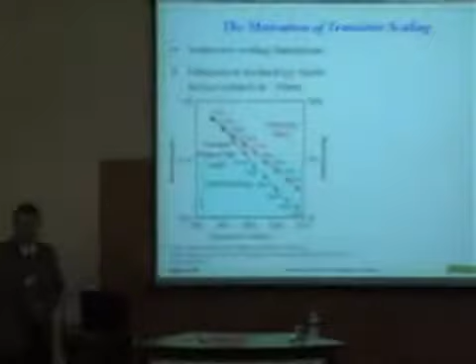So we saw earlier in the conference, I forget which speaker it was, but was looking at the technology integration that's basically documented by Moore's law and the expansion of the scaling of our technologies, as well as the reduction in feature sizes that have allowed that migration to take place.

That's basically represented by this red curve on this graph. As we see, currently production is at 65 nanometers. At 300 millimeter substrates, they are producing 65 nanometer features, which is a remarkable technological feat.

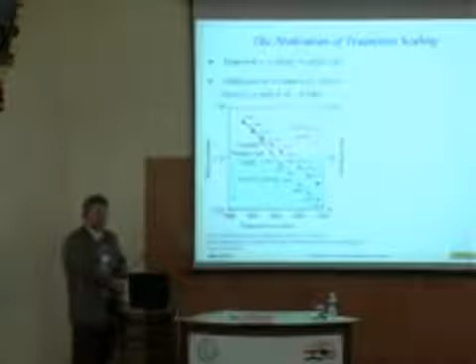This is being done primarily by Intel, but it's being done also by companies like NEC, IBM Corporation, Texas Instruments, a very wide host of companies in the field, Samsung as well. And what was recently announced was the full demonstration of 45 nanometer technologies.

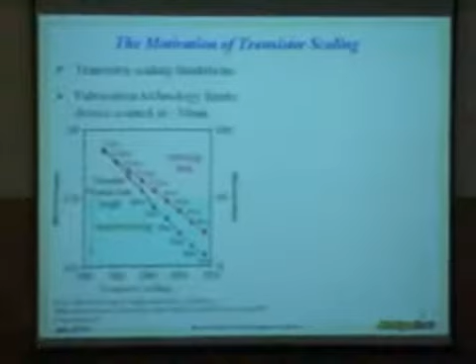This is actually real gate lengths in these devices. Now, when we start talking about dimensions that are 40 nanometers and smaller, we're talking about devices that definitely are reaching quantum limits, and yet they are still pushing existing technologies to these levels.

So the question might be asked, what's going to happen to these quantum-based devices if the trends continue to the ultimate limit that we see with silicon-based FET devices, where the quantum effects tend to take dominance at about 10 nanometers.

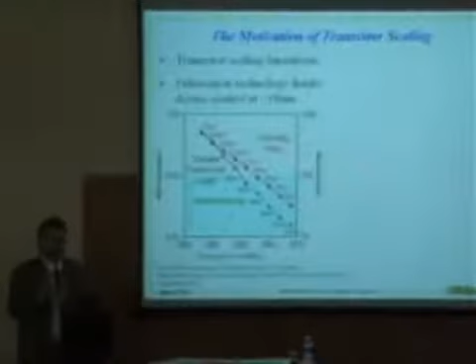We see that nanotechnology and nanoscale devices, which are basically using quantum effects, things like nanowires, nanorods, nanotubes, progressing in size at a more rapid pace, but where these two might merge and how they may work together isn't absolutely clear yet, whether quantum-based devices are going to easily be integrable with microscale FETs or submicron FETs.

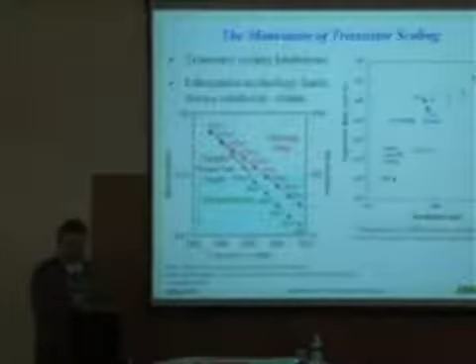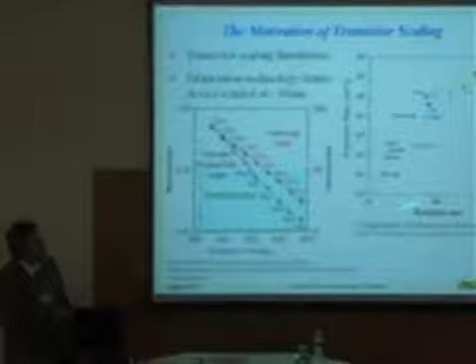So one of the key technologies that limits this is the ability to produce features at these dimensions, and that has been one of the main pressures on the semiconductor industry and on the industry that supplies equipment to it, in producing tool sets that can produce features below 40 nanometers, which is basically right in the middle of this graph here.

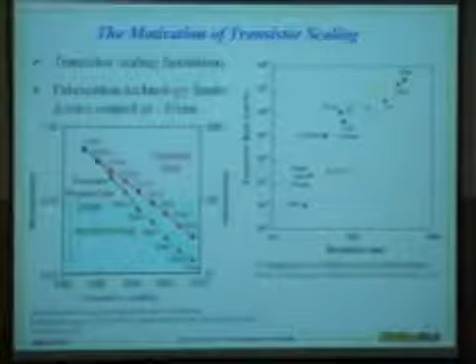X-ray was a favorite for a long time in the 80s and early 90s in trying to look at X-ray technologies as a migration path to smaller features. In reality, the cost, expense, and difficulty of producing X-ray based lithography has basically pushed that trend aside as laser-based light sources have come on at much shorter wavelengths and have kept the industry pushing into these extreme ultraviolet ranges.

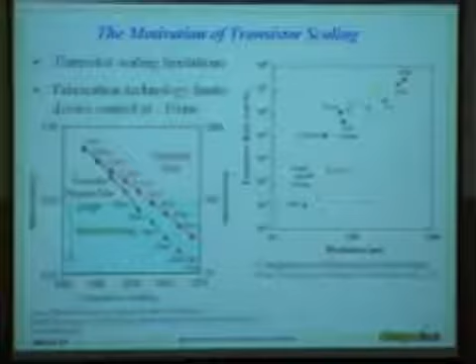But when we look at nanoscale technologies, we have to find a different type of technique to produce 10 nanometer features. The most prevalent method utilized is single point E-beam, or E-beam lithography techniques, as far as producing features that are in the 20 nanometer or possibly even smaller range.

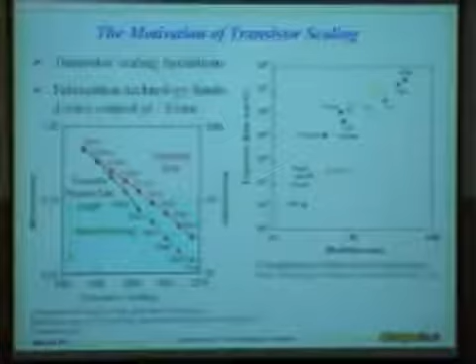I think the smallest I've seen documented is on the order of about 8 nanometers for lithography using electron beam. So we have a smaller set of technologies that allow us to look at these features below 40 nanometers.

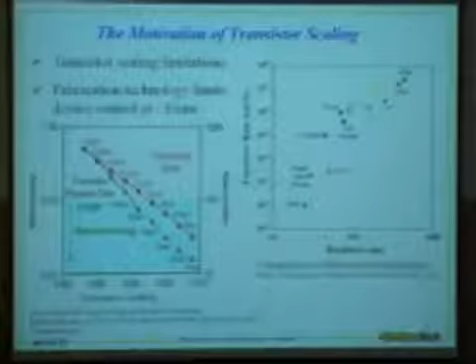We essentially see dip pen writing, ion beam milling, and a few other techniques documented here. I will later in the talk discuss more about how we are addressing producing patterns and producing features at the sub-40 nanometer range.

So how do these nanoscaled and quantum devices fit in with the grand scheme of things? Every couple of years, the International Technology Roadmap Organization produces a new ITRS roadmap for the semiconductor industry, basically drawing on the expertise of some of the leaders in the field.

And in the 2005 edition, they had a very nice graph which represented what they viewed as some of the more important categories associated with these devices. On the horizontal axis here is basically the speed of the devices, projected on this side. The cost is projected along this back face.

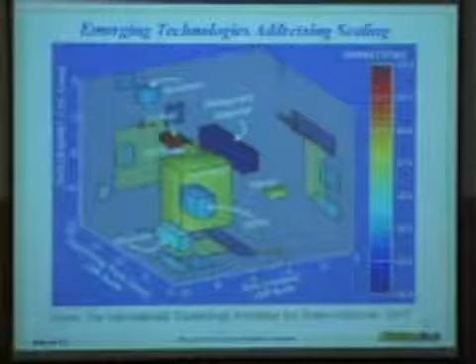The cost of the technology based on the projections that they had, and then the size you can see projected on the bottom face. And if we look at where silicon CMOS-based technologies are, we see that they've basically explored down to about the 10 to the minus 8 meter range, in that 40, 30, 25 nanometer range, possibly even down to 10 nanometers.

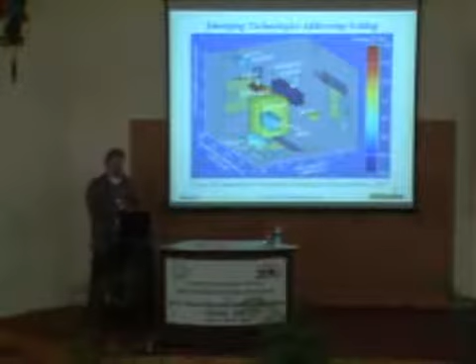And we see where some of these other technologies lie, some of which we've talked about. We've talked about some biologically inspired technologies, molecular electronics. I'm going to be talking about some alternative quantum electronic devices, effectively SET devices. And some of the work discussed about carbon nanotube-based devices also would fall basically in some of these ranges.

But what you'll note is that there are trade-offs in how these devices behave. There's no one device that has either the smallest feature size, coupled with the fastest switching time, coupled with the least expense. So industry is probably going to get to a point where it finds niche areas for specific types of devices and specific types of uses of these different technologies.

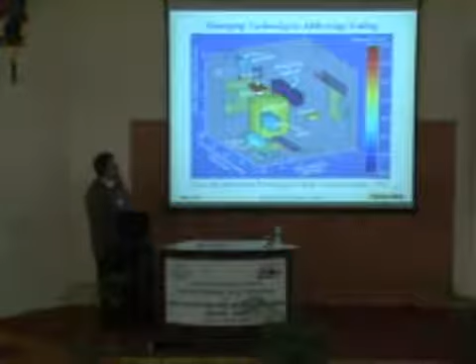So I fully expect us to see over the course of the next 20 years the integration of SET devices with molecular electronics, with biologically inspired devices, perhaps all on the same substrate in the same monolithically integrated package. I fully expect to see all of them for certain applications.

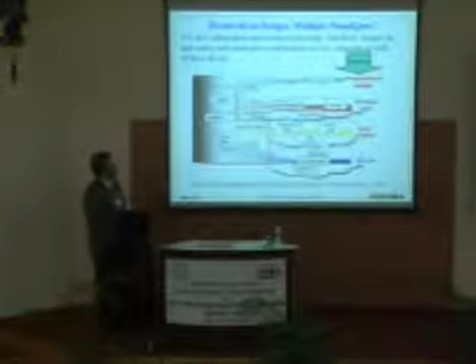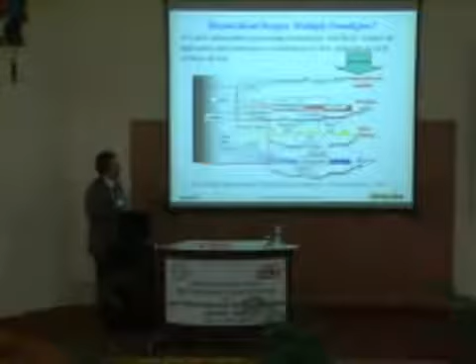So, because they all have different implications for how the device behaves, I think we also have to look at this hierarchical structure where we look at how the device behaves compared to the paradigm that we're currently in, and whether there are other paradigms necessary to allow us to go to the next state, whether it be with the techniques with quantum computing or soft computing, whether some of the spintronic or molecular devices will allow some unique contribution in those areas. That is not fully realized right now.

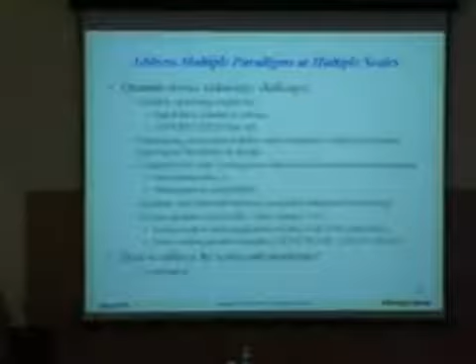So there's a lot of challenges. I think one of the major challenges is finding a way to have these devices interact with the microscale devices, and really that's related to the scalable operating conditions. A major issue with a lot of these ultra small devices is that either they do not conduct a significant amount of charge, or they require a significantly large signal voltage compared to the voltage out that they produce.

And so the signal drive, whether it's a current or voltage drive, and whether we have the potential for amplification, which is one of the main drivers for producing a transistor, is that you can produce amplification or produce some sort of a switching result, is going to be a major issue in which of these types of devices finds utility and in what mode they find utility.

It was brought up earlier in the conference that there's no paradigm right now for looking at how interconnect delays impact computing significantly, and I think that this also is something that we're going to see in a very different way at the quantum scale with these quantum devices.

So I fully expect to see either direct integration or a heterogeneous integration of these devices to find some way to produce compatibility with existing microelectronic infrastructure. Because that infrastructure is not going away. That's an enormously valuable industry to the global economy.

And that's an industry that wants to succeed and wants to find ways to keep itself going and keep itself thriving. So I'm sure that necessity is the mother of invention, and I'm sure that there will be ways that is borne out. So can we find ways to have both quantum and classical behavior merged into this integrated technology?

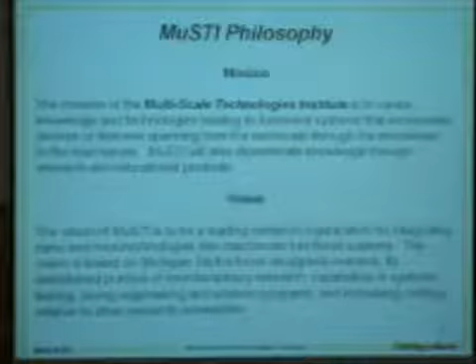This institute was formed during 2006, but really came out of research initiated back in 2000 and in 2003, looking at technologies at the micro and nanoscale and trying to address issues that span the scales, where we were looking at technologies associated with molecular level and atomistic modeling devices, and figure out ways that these devices would be able to interact with the real world, because we certainly live in the real world even if we want to have devices that are at the nanoscale.

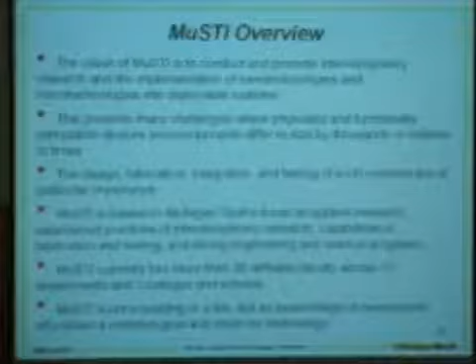So we've done that by providing a framework in which we can conduct and promote interdisciplinary research. We have roughly 35 faculty associated with this institute right now, a very diverse body of faculty, from chemistry to physics to all of the engineering disciplines engaged in our college and university.

This has been our effort to provide a framework from within which faculty at our university can engage in trying to address these questions and address the technologies that both impact the nanoscale, but also find ways to practically apply the technologies and science that's been developed into applications that will impact the real world.

So some of the issues and technologies you've already seen represented through Dr. Yap's presentation and Dr. Pandey's presentation. There's a lot of work that's also done at the mesoscale, modeling and developing technologies.

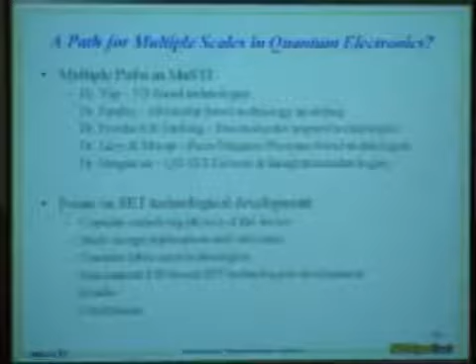So what I'm going to focus on for the remainder of my talk is some work that we started in 2003, really effectively 2004, in developing technologies for producing room temperature single electron transistor devices.

So we have a group, part of my group, looking at the underlying physics of the device, developing the technology, studying the implications of the design, and demonstrating technologies to produce these sub-40 nanometer features. A lot of that focus has been on developing technologies surrounding the focused ion beam instrument that we acquired through this grant that started in 2003.

So why single electron? There are several advantageous characteristics of these devices. They are three-terminal devices that, for the most part, mimic the behavior of field effect devices. That's not completely accurate, but if you think about a field effect device, you can glean most of the understanding you need to understand how the SET device operates.

Based on some of the technologies developed, we can see that they are potentially monolithically integratable with existing microelectronic devices in a truly three-dimensional integration, meaning that we might be able to produce hundreds of layers of SETs, hundreds of sheets of SETs on top of existing platforms. There are several material systems that have been demonstrated to produce very effective room temperature capable SET devices, and both planar and non-planar configurations of these devices have been demonstrated.

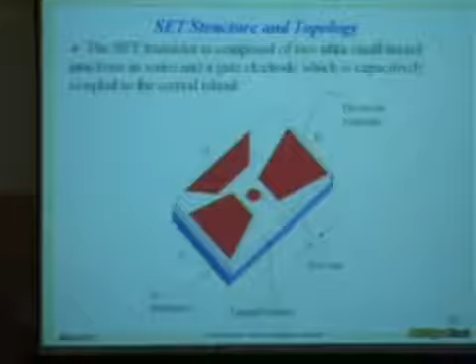So basically, the SET as a three-terminal device has a source, drain, and control gate, just like a FET does. The difference in behavior is that it utilizes either one or many isolated quantum dots to produce a tunneling current behavior that is controlled by this control gate.

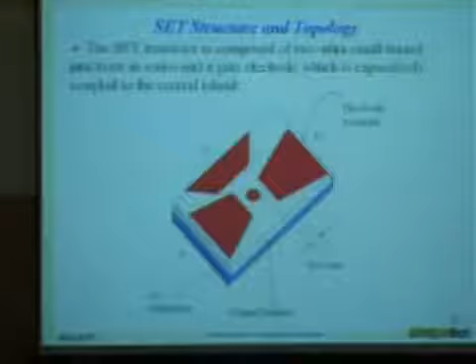So the energy on the quantum dot is controlled by the gate, and the behavior of the device, at least the current throughput, is characterized by unique energy levels, as you would expect for quantum confined electrons on a quantum dot.

The position of the gate matters. The device is configured - for planar devices, top gate, bottom gate, and side gates have all been considered. This is just a simple schematic of a side gate device, where the side gate provides a potential to the quantum dot.

Because the coupling capacitances between the electrodes matter in these devices, you would like to have very small coupling capacitances, very low capacitances, for these devices to operate at speeds that are significant and operate at temperatures that are also significant.

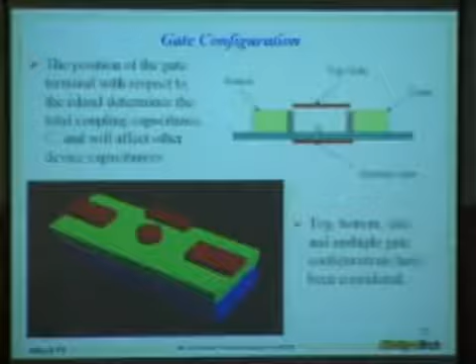Functionally, if you were to draw a schematic of these devices, or how they would be utilized, you have your source and drain terminals coupled to the quantum dot through a capacitance and a tunneling resistance, and you have a capacitively coupled gate to the quantum dot to change the energetics of the dot.

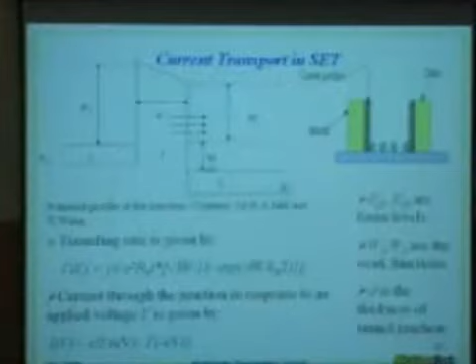The tunneling rate is given by the energetic favorability of the available states, reflected by the energies across your tunneling barrier. This tunneling resistance represents the probability of tunneling across those barriers. Because we want to look at current flow, we want to look at both the tunneling probability both ways and the tunneling probability across both junctions.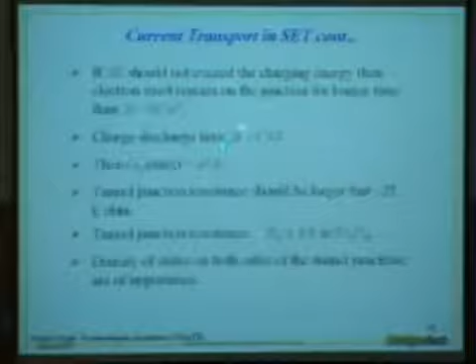There are some characteristic limits of how the device behaves. The charge and discharge time, or the switching time of the device, is related to the total capacitance of the device divided by the conductance of the device. The limit on the conductance is based on the quantum limit of the material. Tunneling junction resistance is also based on the available states on both sides of the boundary. I think I'll move on past this because I want to get into more characteristics.

A significant reference paper produced in 1999 from Konstantin Likharev is a very good survey paper on the fundamentals and the theory behind SET devices.

SETs behave as a switch, as you would expect, based on the gate bias, modulating the region over which electrons can be transported across the barrier. They tend to have characteristics that look very much like this. Interestingly, if you look at deep submicron field effect transistors, you also see a similar kind of behavior in those devices.

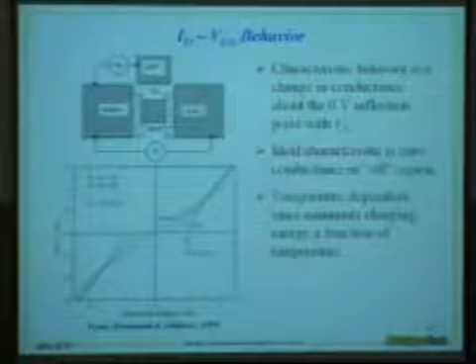So in the region around 0 is where you have this separation, where you basically have an off state or a near off state in the device behavior.

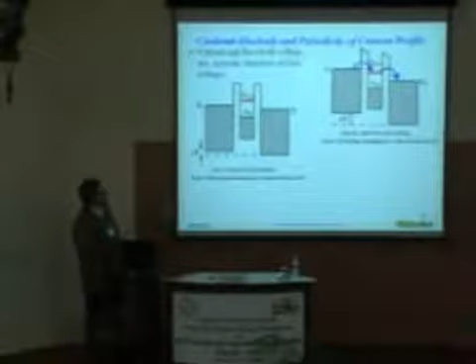As I mentioned earlier, the favorability of tunneling depends upon the energetics of the conditions of the quantum dot with respect to the source and drain. So the side gate or the gate electrode can change the potential on the quantum dot, allowing for a favorable transition to take place one way or the other.

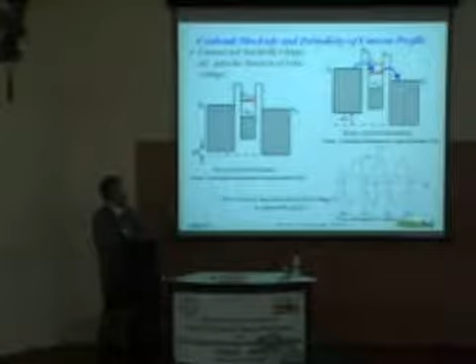These devices can be produced in a fashion where it's a very reversible device. The source and drain can be reversed, or it's possible to make them look very one-sided by adjusting either the width or the barrier height from one side to the other between the source and drain of the device.

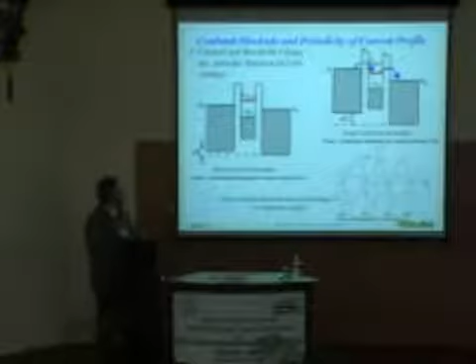Characteristic of these devices are regions at which current can significantly conduct and regions where current does not conduct. As you adjust the gate voltage, you tend to see regions with spikes in current and other regions with nulls in current, related to the energies of the available states. This is borne out in what's called Coulomb oscillations in the output drain current as a result of sweeping the gate voltage for various drain source biases.

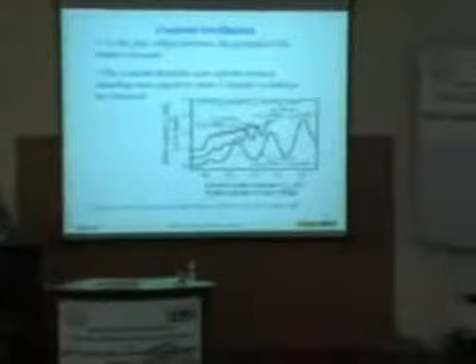This is an example of that for different conditions. This device in particular was measured at 77 Kelvin. The characteristic widths and heights of the current spikes seen in the Coulomb oscillations are representative of the energies in the system.

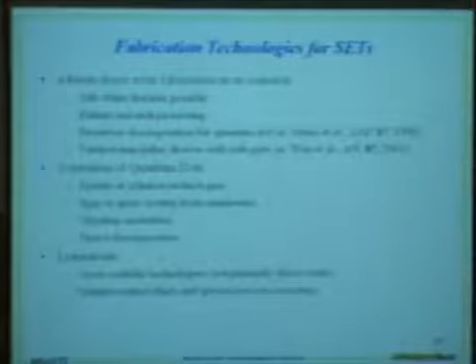There are some major challenges for fabricating these devices. The most common method right now is E-beam direct lithography, capable of producing sub-40 nanometer features. It has been used for both the pattern and etch process, where a pattern is produced in resist and a feature in the underlying quantum dot and electrodes are produced by etching. It's also been used for direct decomposition of quantum dots and for producing both vertical and lateral type devices.

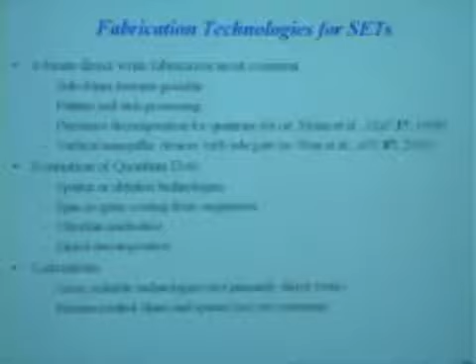There are many methods for quantum dots. There's sputter or spin or spray coating from a suspension. Some of these have already been discussed at this meeting. We have the potential also for ultra-thin nucleation, where we have a droplet nucleation on the surface by evaporation or other methods, or direct decomposition techniques.

The limitations we see are that E-beam lithography is not an easy technique to do large volumes of devices at once. So if we're looking at producing a 300 millimeter substrate with billions of transistors on it, it is not an array scalable technology.

It's not something that you'd want to have to direct write for every wafer. It would be very time consuming and very expensive as a result. And we still have issues with feature control where our lines and spaces are not yet consistent because we're pushing the limits of these capabilities, these technologies.

So because of our acquisition of our focused ion beam tool, we've taken a look at that as a potential technique for producing a planar SET structure. We've done some development on focused ion beam etching as well as deposition methods, and I'm going to present some of that hopefully relatively briefly to you.

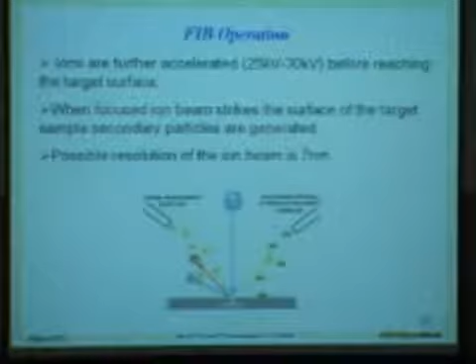So when focused on the surface, they have the possibility of producing one of 4 different things. They can sputter etch the surface, they can produce heat in the substrate, they can implant themselves into the substrate, or they can be used to decompose a gas at or near the substrate.

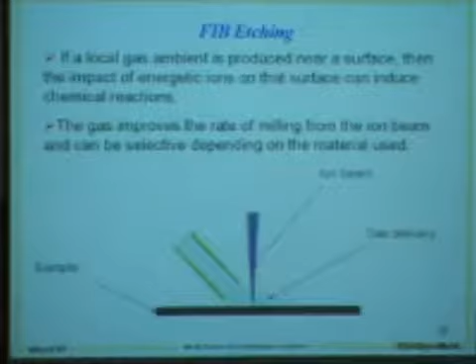So in an etching condition, the ions, as they reach the surface, primarily serve to heat and sputter the material from the surface, and this is called the ion milling technique that you may be familiar with.

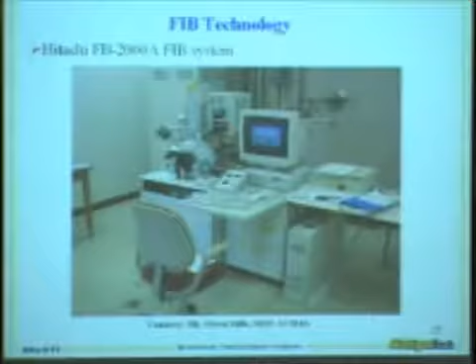So another image of the column. This is actually our Hitachi FB2000 FIB that we utilize. This is configured also with a beam scanner that allows us to use direct CAD layouts for producing features on our substrate, and gives us a lot more beam control than the system as is.

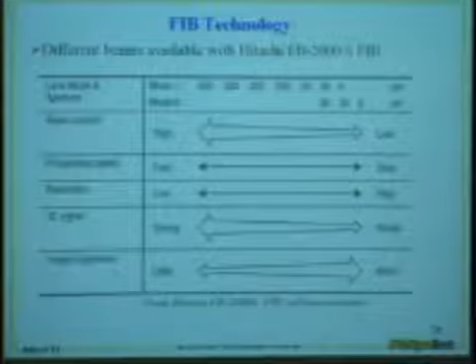There are many modes that we can choose from: very large apertures and high beam currents to very small apertures and small beam currents that can be used for different applications, whether milling or for deposition or for very fine resolution pattern milling, and some basic kind of common sense sort of things. The larger the beam size, the faster your processing, and the lower your resolution, as you would expect.

So more detail of these modes: we see that we have a range of beam currents from tens of nanoamps down to a few picoamps. So we have a very large range over which the process can be controlled for producing features at various scales, and we make very good use of that in the production of our features.

So typically the beam is scanned in a raster arrangement based on the magnification that's been chosen and the beam size that's been chosen. The pixels that are magnified are determined by the magnification, the center-to-center distance, and the distance between the raster scans of the beam. And the dwell time defines basically how long the pixel maintains, or how long the beam stays at a particular pixel.

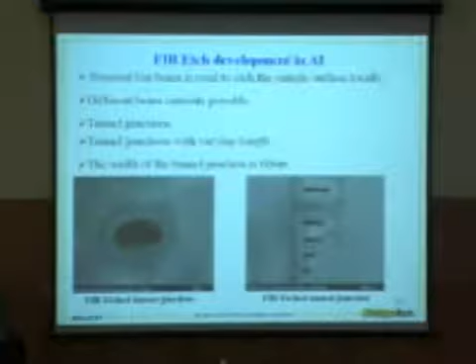The effort has been used to initially look at what kind of minimum features can we produce. These were some features that were down in the 100 nanometer range for etching. We wanted to see, can we produce quantum dots by this method out of a single sheet of, or a continuous sheet of metal. And we've shown that yes, you can, but in the etch method you're limited in the production of the dots based on the size.

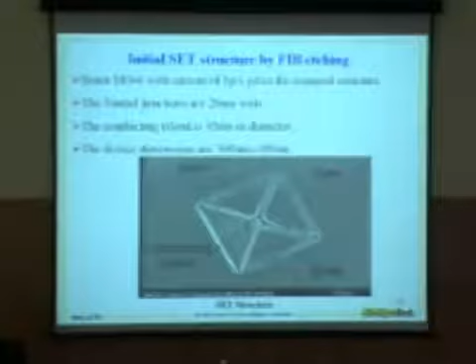We found this somewhat troubling because we didn't really want a SET with a 40 nanometer quantum dot. We wanted an SET with a quantum dot that was significantly smaller, so that would be much more feasible to operate at room temperature. A 40 nanometer dot basically can operate in the liquid nitrogen temperature range.

So we developed this etch technique as far as we could to produce the actual 3-terminal structure, producing then a 40 nanometer quantum dot with basically a 20 nanometer tunnel junction, which is a very large tunnel junction, source, drain, and gate features by this focused ion beam milling.

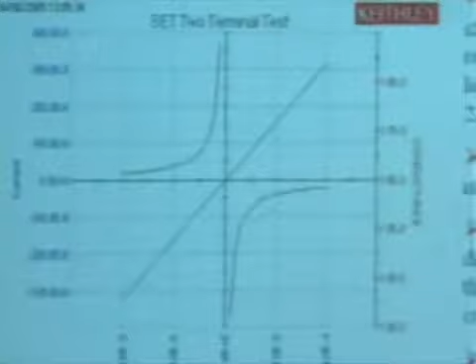Well, it wasn't an ideal structure, but we wanted to see what it would do. So we did some initial testing on this device and determined that yes, we did have isolation. We were getting some unusual behavior from our conductance curve. Looks like a straight line. It's not exactly a straight line near zero gate potential.

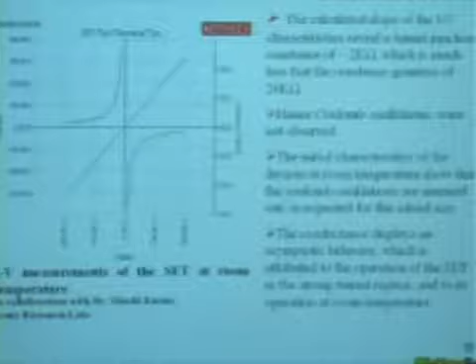What we saw was that our tunnel junction resistance was significantly smaller than our quantum resistance, just based on the thermal energies of the electrons. So we didn't see any Coulomb oscillations with this initial device because we had such a large quantum dot. But it did allow us to look at some initial behavior of the device, and allowed us to pursue an alternative path. I'm going to skip this for the time being.

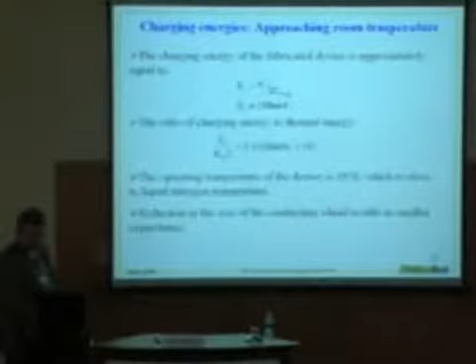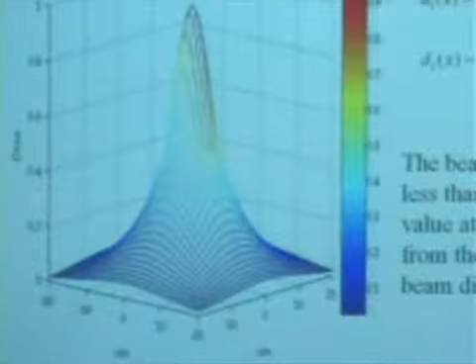An alternative path where we wanted to understand what were the limitations of the process technology, what were the limitations of the beam etching. The focused ion beam has an error function profile near its tip with a Gaussian tail. This is a profile that has been characterized over the last decade by the manufacturers as well as by several researchers around the world.

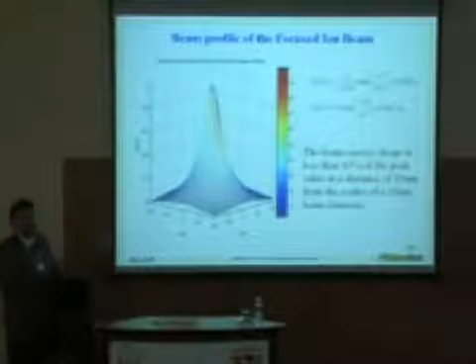That profile results in a significant amount of energy and a significant dose of ions that extend far beyond the nominal full width half max feature profile, which is what is stated. So we wanted to look at how small can we actually go with this technology, and what are the implications of doing this etch.

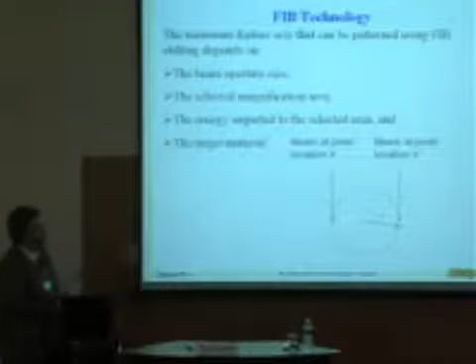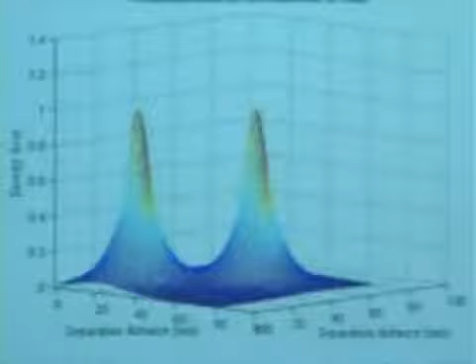So we played with the parameters of our tool, looking at a circular rastering pattern, which was required to produce an isolated dot. We wanted to look at how much energy was being imparted to the region inside this raster scan, to understand both material properties and how much energy was being applied to the dot as opposed to the region where we wanted the sputter etching to take place. So we did a series of models to look at how the energy overlap behaves as you bring that circular raster scan closer.

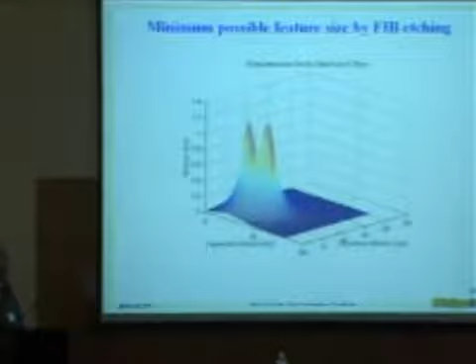We see that at 40 nanometers we have minimal energy being applied to the central region of the dot. But as we get to smaller regions, 20 nanometers for instance, which would be a very nice size, this would produce on the order of a 12 to 10 nanometer quantum dot. We see that roughly 60 to 80% of the energy that we see at the peak of the beam is being applied to the center of the dot as well.

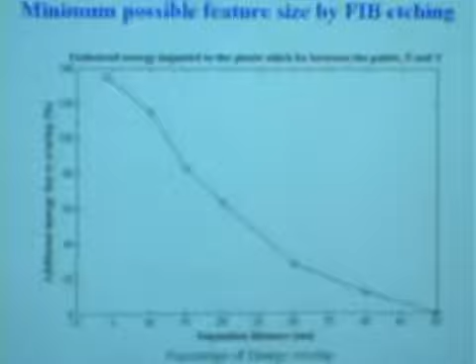Obviously as you get closer, that becomes even more of a problem, where basically you're overlaying your beam right on itself. We see that we have really a functional limit in terms of how much or how close in proximity we can produce features. And we've seen this through other experimental evidence that the amount of energy applied to the regions we don't want to etch becomes significant at sizes below 30 nanometers, even for the smallest beam size we can produce.

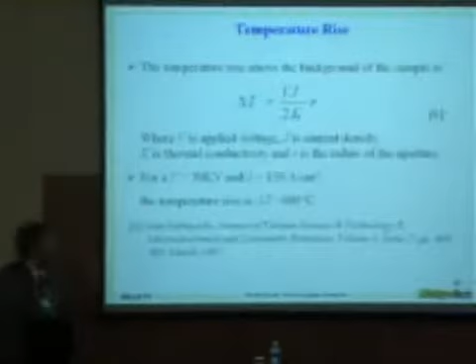We did some analysis of this based on the dose, the accelerating voltage, and the radius of our raster scan, and we found that for a 30 nanometer radius, we were seeing temperatures on the order of 600 degrees C locally where that dot was being produced.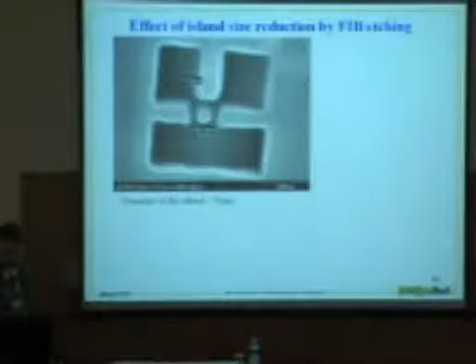So just some examples of how this was done. We see at 50 and 45 nanometers that we can still produce quantum dots, but at dimensions below 30 nanometers, especially in aluminum, which is a lower temperature material, we're seeing this causing a problem. So we thought, okay, we're not going to be able to get our 1 to 10 nanometer quantum dots by etching. We're going to have to come up with another technique.

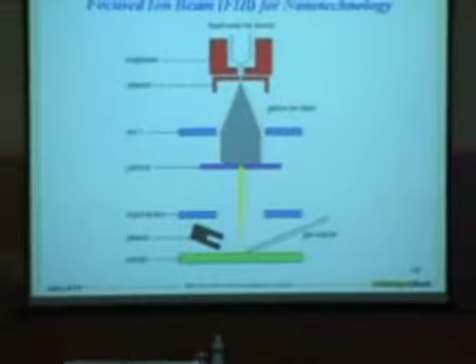Well, fortunately, we also are able to do deposition with our tool, and we actually have a tungsten gas source, a tungsten precursor source for producing tungsten thin films by FIB. And we thought, okay, can we produce isolated islands of tungsten by FIB deposition? So we wanted to look at controlling the island formation.

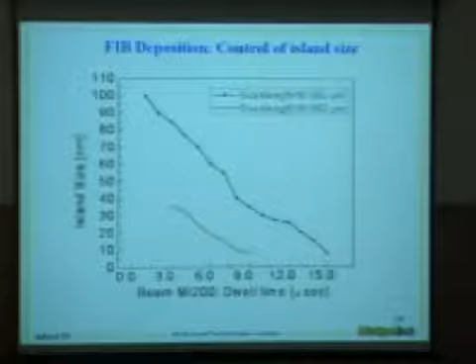We found that by controlling our residence time, we are able to produce isolated islands on the order of 10 nanometers or smaller, because of the trade-off in the deposition rate versus the sputter ablation rate caused by the FIB beam. So we were able to produce islands. I think one of my slides is missing here.

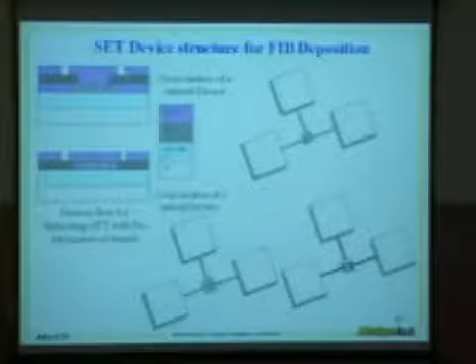Sorry, I'm missing a very important slide, but I'll show it to you here. We're able to produce isolated islands in a matrix that range from basically 15 down to about 6 or 5. This we can do very repeatedly, very controllably. We're using this as our source for our quantum dots for our SET devices.

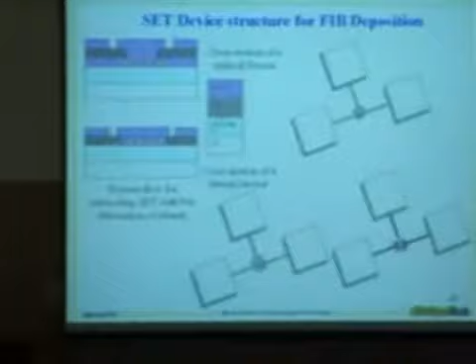We have looked at a new technology utilizing the deposition mode for producing the quantum dots, and then using deposition also for producing the leads into the device. So instead of a single dot device, we're looking at a multi-dot SET, which changes its behavior somewhat. I'll show you some results on these devices next.

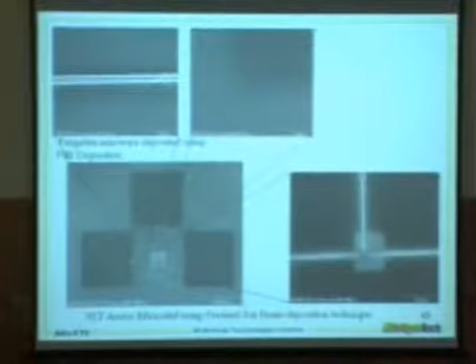We found that this technique works very well. We have a technique for oxidizing the quantum dots that is not yet published, so I'm not going to talk about it, and actually I'm not authorized to talk about it yet. With this device we're able to produce on the order of 50 nanometer spacing between our source and drain electrodes, which means we probably have on the order of 3 to 5 quantum dots minimum that are participating in conduction.

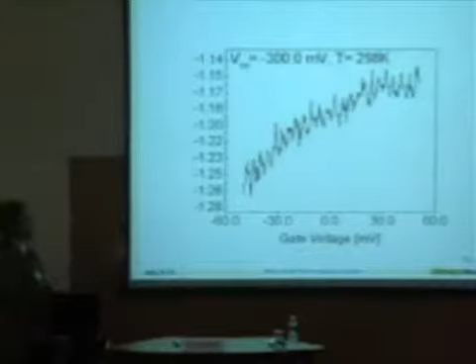In the device, we see that, as we saw with the reference source, about zero gate potential and zero drain potential, we see curvature in our conductance, and that's indicative of this quantum behavior in the SET. That is confirmed even further as we look at a small scan across gate voltage, and we see this behavior of Coulomb blockade taking place in our drain current for a given source drain voltage.

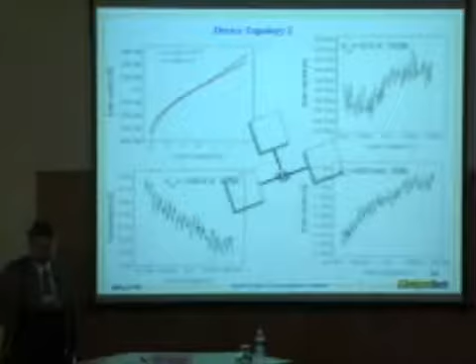So for the various topologies we've looked at these results, and we do have confirmation in these outputs that we are indeed seeing these Coulomb blockade events and quantum confinement results in the outputs.

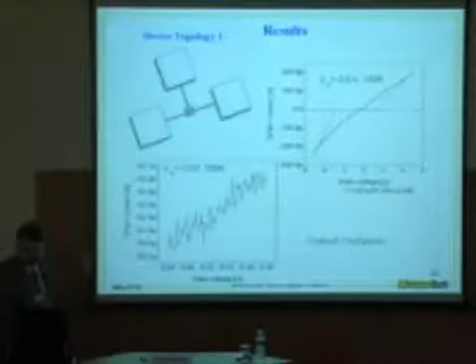Again, various device topologies give slightly different behaviors. We see in this case much stronger curvature at the extremes of the conductance curve, which is potentially a good thing. We see this for a variety of different devices, spacings, and configurations.

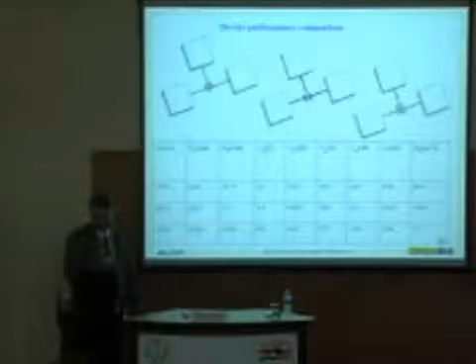So we have confirmation that, yes, we do see room temperature SET behavior. To our knowledge, we are the 5th group in the world that's demonstrated room temperature SET behavior. There's only one other group in the US that's done it. This field has been around for 10 to 15 years. These sorts of devices have been proposed much earlier than that, but effectively have been studied for the last 10 to 15 years. The first demonstration was in the late 80s and some demonstrations in the late 90s. But there haven't been any other recent demonstrations, and certainly not with this system or by this method.

So from these results, we see that we have tunneling resistances that are on the order of tens of gigaohms. This is very good for room temperature operation, in a range that's very appropriate. We also see drain source capacitances, one of these key capacitances, that for different device configurations are very small, on the order of a tenth or smaller of an attofarad, which basically means that we're looking at very small numbers of electrons in these systems, which is very good.

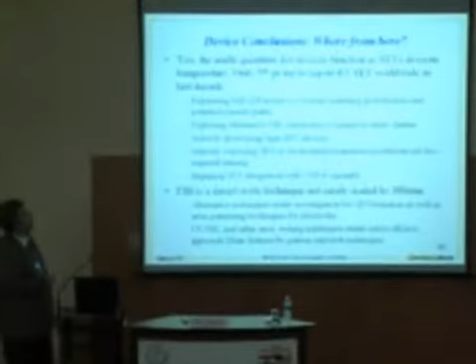So where do we go from here? Yes, we have a multi-dot quantum SET device that works at room temperature. We are looking very seriously at expanding our modeling. I have a new doctoral student who started with me this year to fully correlate the tunneling probabilities and potential parallel paths, as well as trying to look at the impacts of the actual dot behavior. We are also actively exploring alternatives to our FIB for area patterning, because that, as I mentioned, is one of the key issues with all of these technologies. How do we produce these devices over a large area without requiring hours and hours of electron beam lithography time?

We're exploring the SET as an electrometer transduction platform for bio-inspired sensing. We have an active effort in that area. That's actually where the initial SET effort came out of, and we are currently engaging with Freescale Semiconductor and with IBM Corporation, looking at integrating these SET devices directly within CMOS.

FIB is not easily scaled to large scales, and we do need to address this. Another one of my doctoral students is very actively looking at ultraviolet nano imprint lithography as an array writing technique that will allow us to get into that 10 to 20 nanometer range in the near future. We're looking at that in probably the next 18 months.

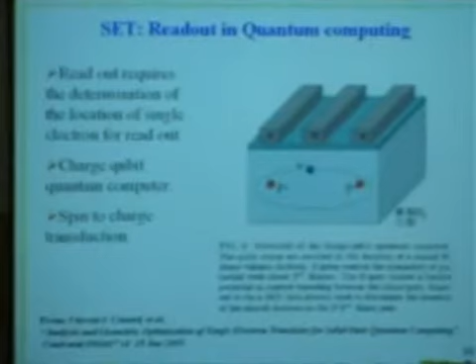So can we use these? These devices have been demonstrated to be useful in reading out quantum dots, so they may have application in QCA logic and QCA memory. They have also been used as electrometers - that's basically how they've been used with the QCAs as well. They're very sensitive single electron electrometers, and they've been used for ultrasensitive measurements, basically single molecule kind of sensing applications.

Coupling to the charge in a qubit is another way that's been considered and theorized—I believe this is a theoretical paper. There are ways this can be used to directly integrate quantum computing with these sorts of quantum electronic devices, and ultimately we hope to see the merger of these quantum scale devices with our microscale and macroscale world.

At room temperature too, which is what everybody wants.